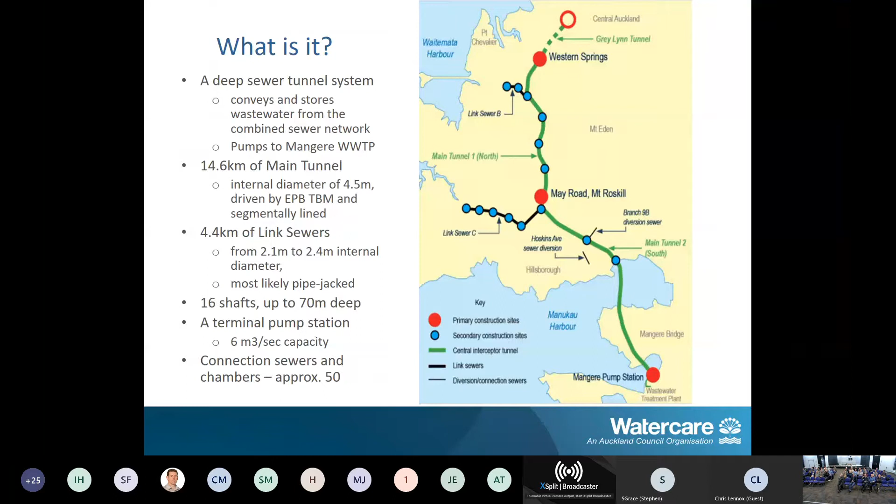There are quite a few connection sewers as well, probably 50-odd chambers. By themselves they're not an inconsequential amount of work, particularly given the difficulty of connecting in an urban environment, so they're probably $50 or $60 million just by themselves. The whole project has a value of 1.2 billion, probably the biggest project Watercare's undertaken, certainly in the last 20 years. By comparison, the cost of the City Rail Link, which seems to keep going up, is about 3.5 billion.

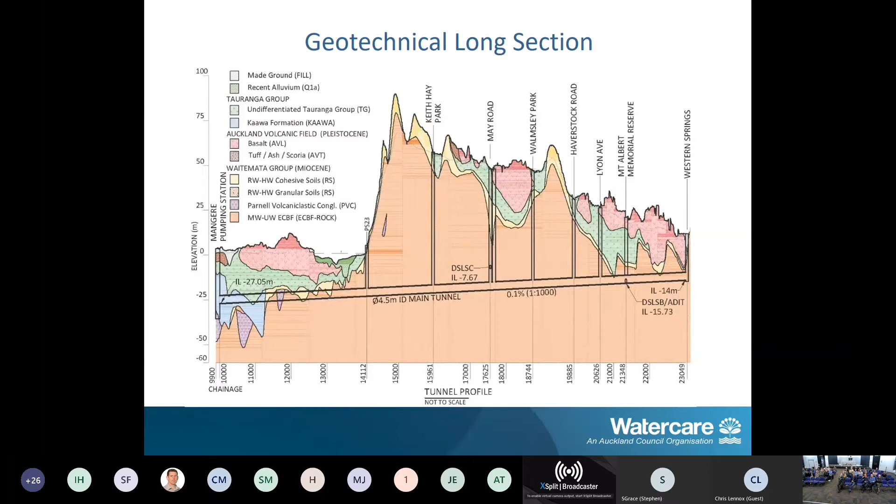So as I said, it's a gravity sewer from Western Springs or Grey Lynn to Mangere. The reason it's so deep is mainly geology. In the north we have a lot of basalt from the volcanic field, and some in the south as well with Mangere Mountain. So we've positioned the sewer underneath the basalt rock in the easily tunneled sandstones. For comparison, the rock can be up to 300 megapascals in strength, whereas the sandstone bedrock of Auckland is more like 3 to 6 megapascals, so it's a much better material to be tunneled.

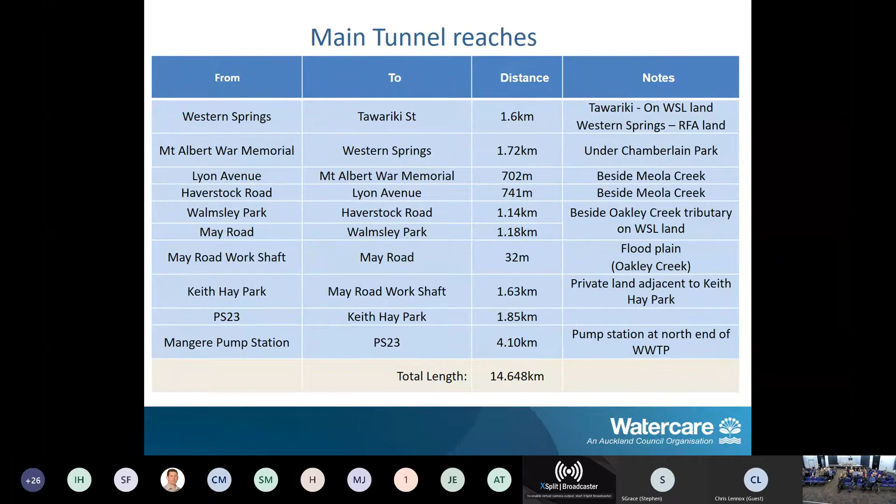Main tunnel reaches vary, up to about 4 kilometres for the southern part of the tunnel from Mangere up to Hillsborough. That number's just for the main tunnel, the 14.6. You can see there are some quite long reaches here, which would make access for maintenance very difficult.

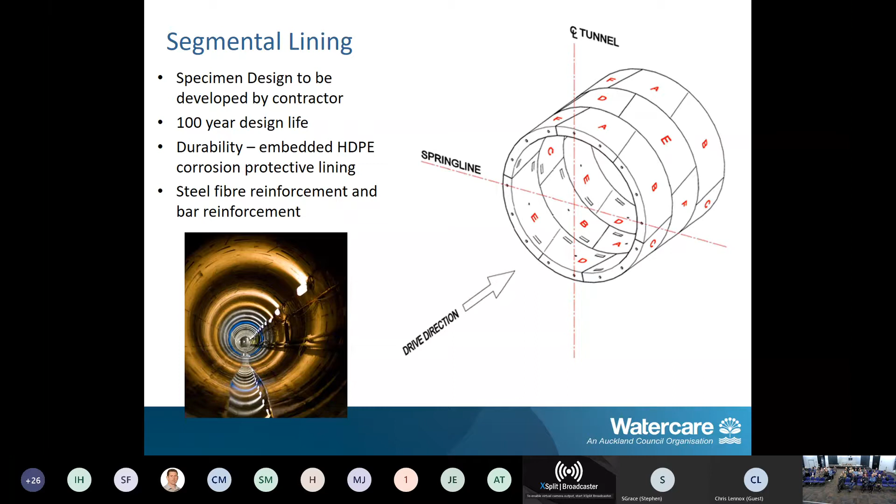The tunnel will be lined with concrete, with an embedded HDPE liner for corrosion protection. This segmental lining is pretty common in tunnels around the world. The link sewers will be pipes jacked in the conventional pipe jacking microtunneling exercise. They'll be partially reinforced with steel rebar, and some segments, mainly through the sandstone reaches, will use just steel fibre, a hairpin-type fibre of steel impregnated into the concrete. It has a 100-year design life.

So why is this scheme needed? It's principally because we've got some pretty old assets that are in vulnerable states. The Manukau siphon goes under the Manukau harbour, and that was laid in the 1960s, so it's coming up for 60, 70 years old.

That has always been a concern because it's laid on the seafloor in a trench, installed using a drag line. So it's exposed to being snagged by shipping and other things, but it's also exposed to the marine environment. When we build our tunnel, we'll be 15 metres under the seafloor at minimum depth, so it'll be more protected.

There's also a lot of growth projected in Auckland. We're currently sitting at about 1.5 million, and by 2030 we're expected to be 2 million. We see a lot of that development particularly in the catchments where we'll be working around Mount Roskill and Mount Albert, and catchments beyond that are also experiencing a lot of growth. So the Central Interceptor provides a spine network that we can connect some of these overflows to, and also areas under growth pressure, as well as reinforcement for the rest of the network.

All of the area on the eastern bays will be relieved by us diverting some of the flow. Essentially at the moment the Ōrākei system takes water from Western Springs, takes it all the way through the city out to Glendowie, then south through Otahuhu back to Mangere. So there's a big loop, which is a bit crazy, and it means by the time the sewage gets to Mangere it's quite septic. So we're taking it in a shorter, more direct route.

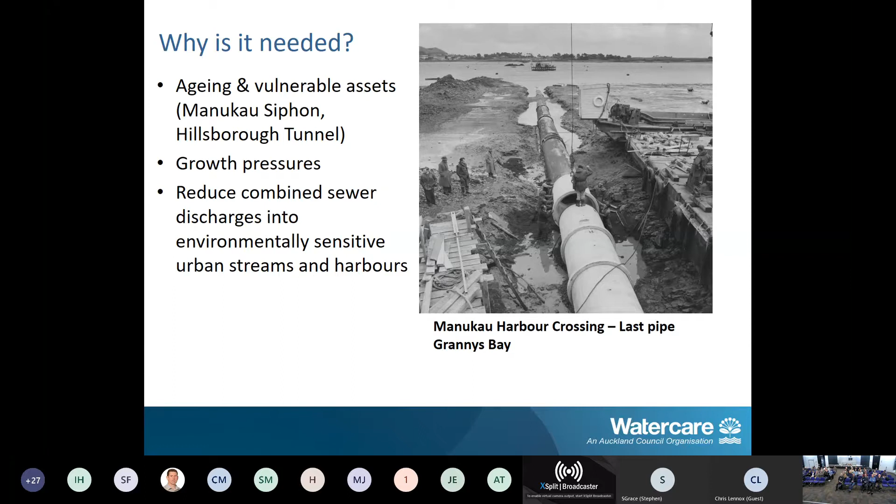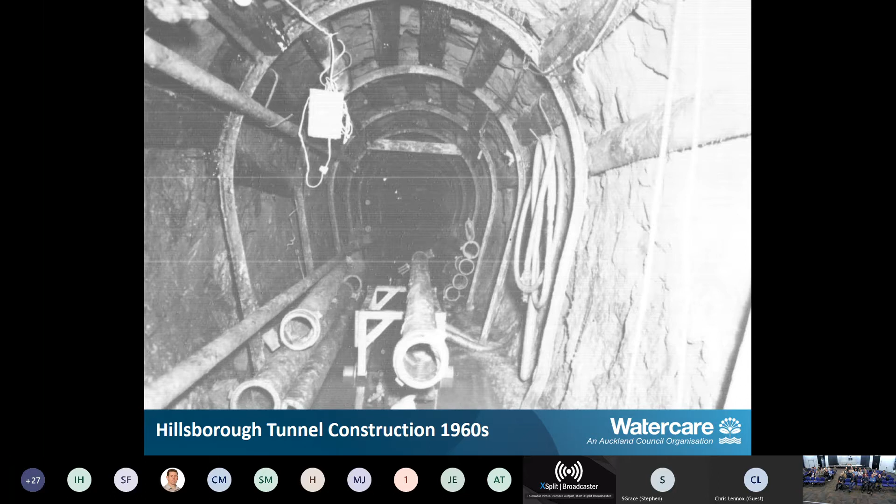This is a section of the Hillsborough Tunnel, which runs under the Hillsborough Ridge. Our tunnel will duplicate this and ultimately replace it. The tunnel depth at that point is 110 metres below the Hillsborough Road Ridge. You can see the very traditional means of installing it, and the very inaccessible condition.

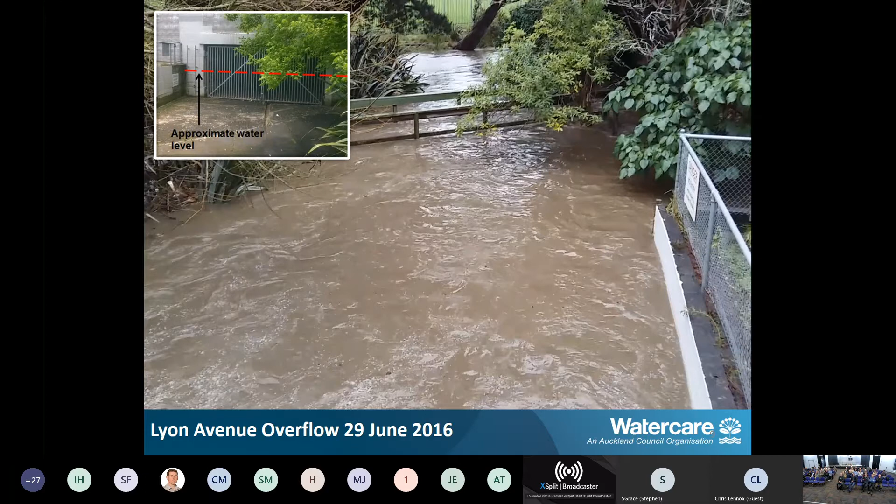This is the Lyon Ave spillway in Mount Albert, showing an overflow that occurred in 2016. It's good to compare it with the size of the gates on the overflow spillway, approximately 1 metre high. That's about 4 cumecs flowing out into the Meola stream, diluted with stormwater, but essentially it is combined sewage. This happens very regularly, usually in a big downpour, but it can take relatively little rain for this spillway to trigger.

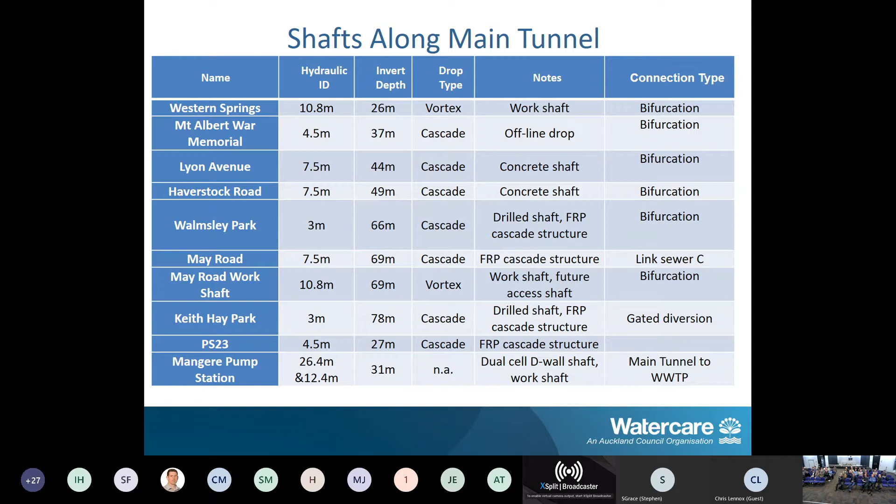I talked about the shafts. This is often described as a project of shafts rather than a tunnel, because the shafts are the more complex elements. You can see the depths — 78 metres at Keith Hay Park, so very deep. Quite uncommon in a civil engineering context to be drilling shafts that deep, less so in a mining environment where they can go for a kilometre or more.

As you might expect, we're using some of the modern tools, so we've got 3D imagery. We use this a lot for stakeholder engagement, so we can describe to stakeholders what's actually going to be built in their backyard. But we've also used it for safety and design and for planning construction. These tools are really useful, and I've got an example of the pump station at the end of the slideshow.

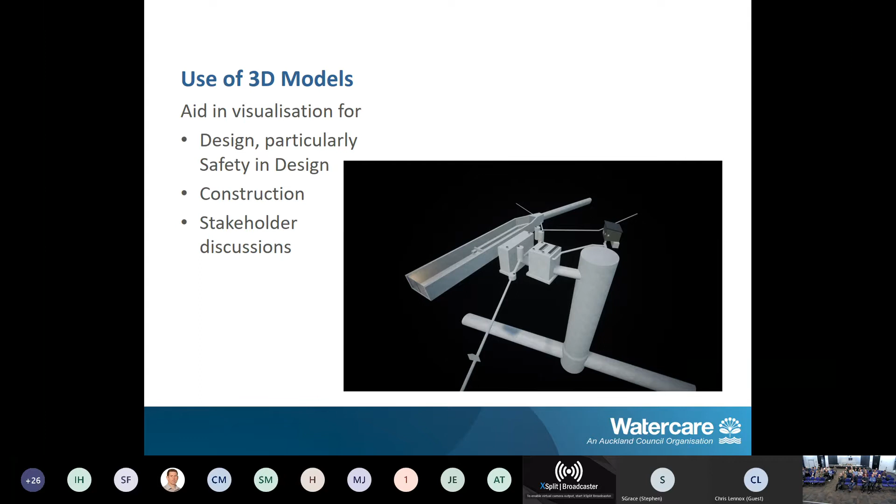The drop shafts — there's 16 of them — and we went predominantly with a cascade drop shaft style. These have quite a few benefits: you can insert flows at any level. The alternative would have been a vortex drop shaft, where you put it in at the top and it spins around as it goes down the chute. You can't interrupt the flow on a vortex because it develops what they call an air core, which draws air down into the tunnel. So there are a number of benefits to the cascade drop shaft.

It has a wet side and a dry side. The dry side we use for ventilation and pneumatic control, as well as for inspections, while the wet side carries the flow. Most of the shafts are big enough that we can drop a man cage down on a crane for inspection, but we anticipate technology will continue to evolve — we're already using drones for monitoring construction progress. So we expect that in time we won't have to put people in these holes; we'll be able to send a robot down.

There's a mention there about real-time control gates. So essentially we've got a number of gates on the scheme that control the inflow into the tunnel, and that's to stop the tunnel from overfilling.

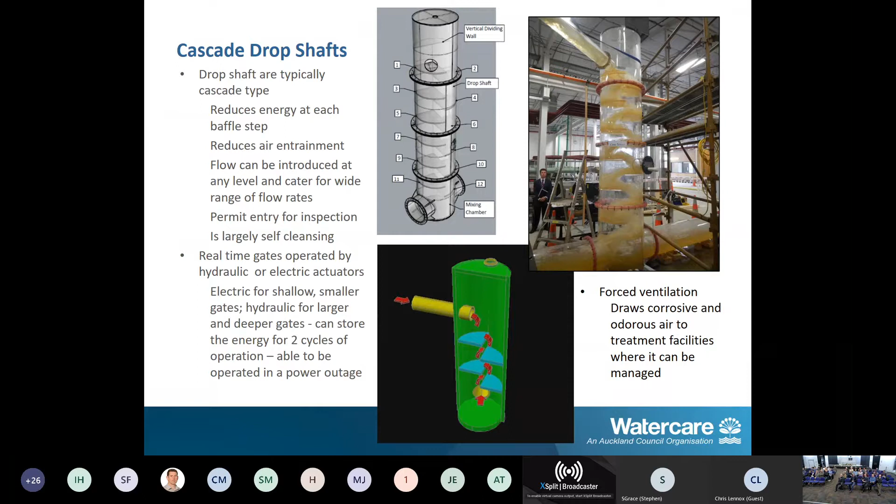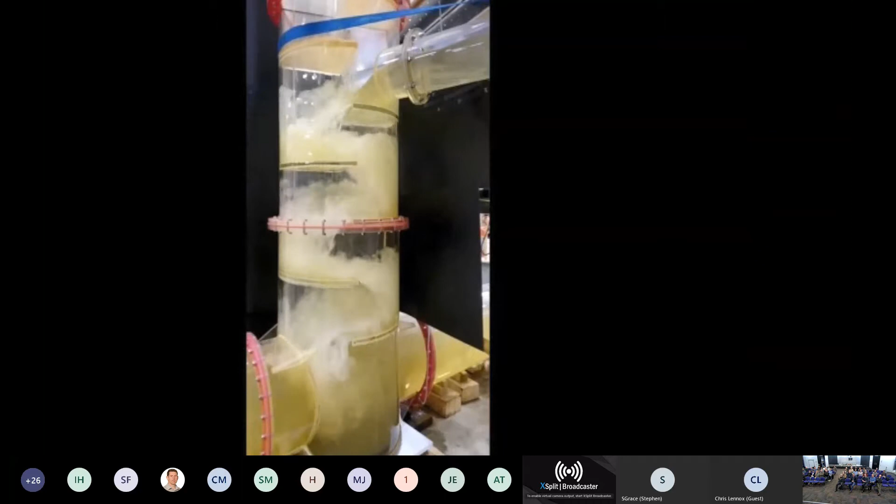This is a very slow video of the Cascade drop shaft physical model that we built at Auckland University. We did this in the fluids lab in Khyber Pass, and we tested a model of the Cascade drop through about a dozen scenarios - tunnel full, tunnel empty, sudden rush of flow, introducing flow at different levels - just to prove to ourselves that it was the right tool for the job.

That was quite a useful exercise, and it really brought the project to life as well, because we hadn't built anything at that stage. We had some drawings and thoughts, but we didn't actually have anything physical, so it was actually quite nice to have that.

The link sewers are, as I said, quite sizable assets in their own right, and the longest one is almost 1 kilometre long in a single drive. It's not a world record, but in New Zealand it's quite a long way to jack a pipe. And those pipes are over 2 metres, so they're quite sizable in their own right.

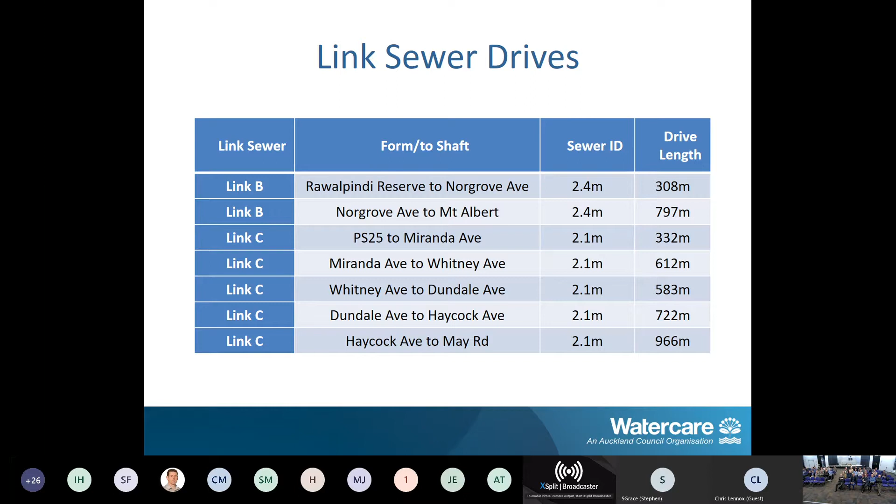I'll probably skip over this, but just to say that the link sewer shafts are not shallow - they're quite deep in their own right, so 26, 28, 25, 31 metres deep. They're pretty deep in their own right.

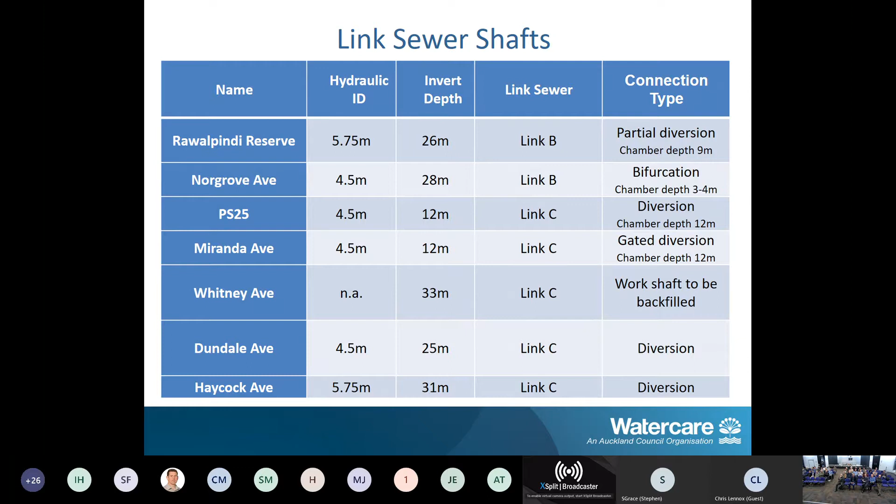So we're going to control the gates that control the inflow into the tunnel using the Mangere treatment plant system. The pump station at the treatment plant will be controlled on a Delta V Emerson system, which is what the plant uses. So the plant will control how the pump station operates and how much flow it takes into the headworks.

We will have a digital microwave radio UHF control system for the gates that gets operated through a repeater on Sky Tower.

And obviously there's a finite capacity in the tunnel - it's got about 240,000 cubic metres of storage. Once the tunnel is full, as I said before, we have to close the gates and spill to the environment. So we have a network discharge consent that requires us to meet a 2 to 6 spills per annum frequency, and a volumetric limit on how much the Central Interceptor can spill as well. So there are a few controls.

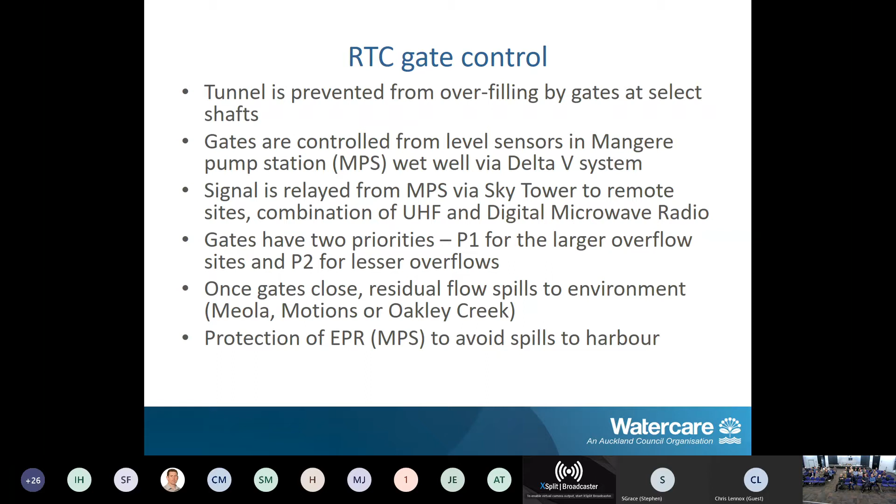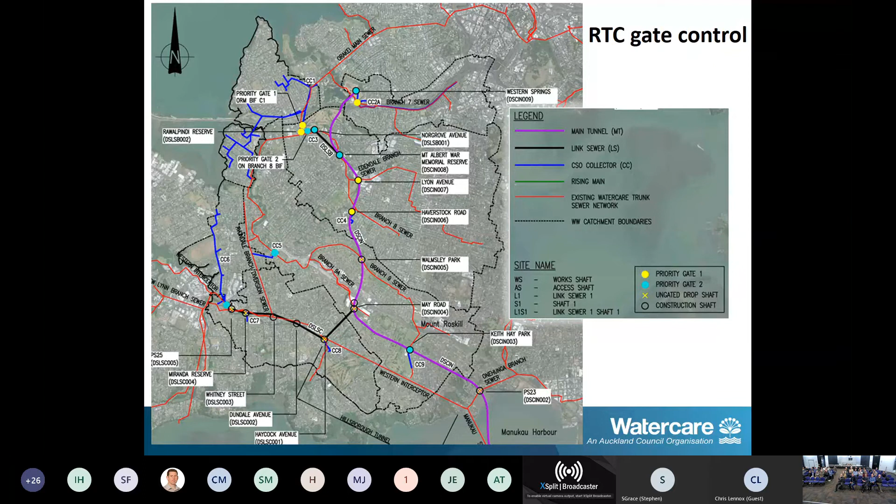240,000 cubic metres - 240 million litres if you talk in that parlance. And the gates are scattered throughout the city at different locations. Some of them require above ground structures, so we will be building some structures above ground - plant rooms that will look probably not as engineeringly mundane as this.

Some of them will have a public art treatment, which we're negotiating with Auckland Council. So we've got a number of requirements around those plant rooms.

The gates themselves will be a mixture of electric actuation and hydraulic. The hydraulic actuation isn't common to Watercare. We would normally put in Rotork electric actuators, but the feeling was that some of the deeper gates are large, and that we'd get a bit more power with a hydraulic system.

Also they're more resilient in terms of they can operate with a minimal power input using solenoid controls. So they would have a stored nitrogen accumulator cylinder system that enables you to cycle through 2 open-close cycles before you run out of that stored energy. The idea was these are going to be more resilient.

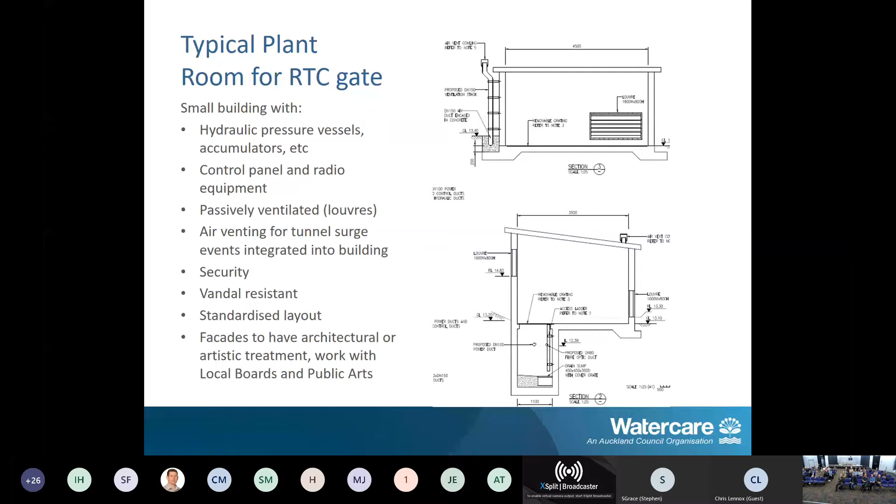We're going to get power outages in a storm when the tunnel's filling. We need something that's going to be a bit more capable of surviving that. And that's just a screenshot of a plant room concept.

So the pump station is, again, quite a sizable structure. It's got a value of about $80 or $90 million. It's very similar to another pump station that I'll show you in a minute. And it's got a capacity of 6 cubic meters per second with 6 pumps. So these are not small pumps.

They're installed with a manifold that enables you to feed flow different ways into 2 large rising mains of a 1400 millimeter internal diameter. They're being built right now, and they have to feed their way through the treatment plant, which is very congested with services. John will know all about that.

It's a portal frame building, and our consent requires us to have backup power supply. So we've extended the 11 kV ring main around the plant, so it actually now serves the pump station and the top end of the plant. But in addition to that, we're required to have an independent form of power.

So we're going to be installing standby generators. I think there's 4 or 5 of them to provide a 5 MVA capacity to run the pumps. So it's quite a big structure with all of that.

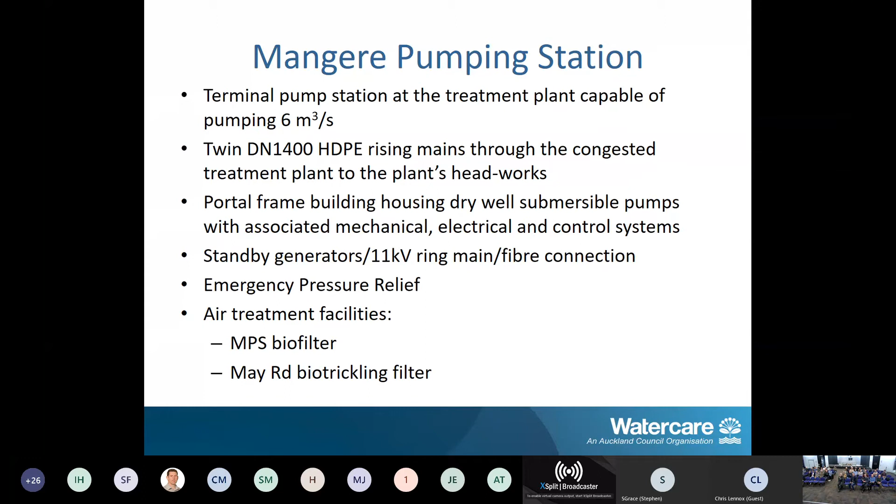And as I said, at May Road in Mangere, we have air treatment facilities. So that's a layout of the scheme at Mangere. If this works.

So this is the pump station here. This is the biofilter. It's going to be one of the largest biofilters that Watercare operates. This is the emergency pressure relief, which is this big box culvert structure. And then we have twin rising mains heading off into the plant through a manifold.

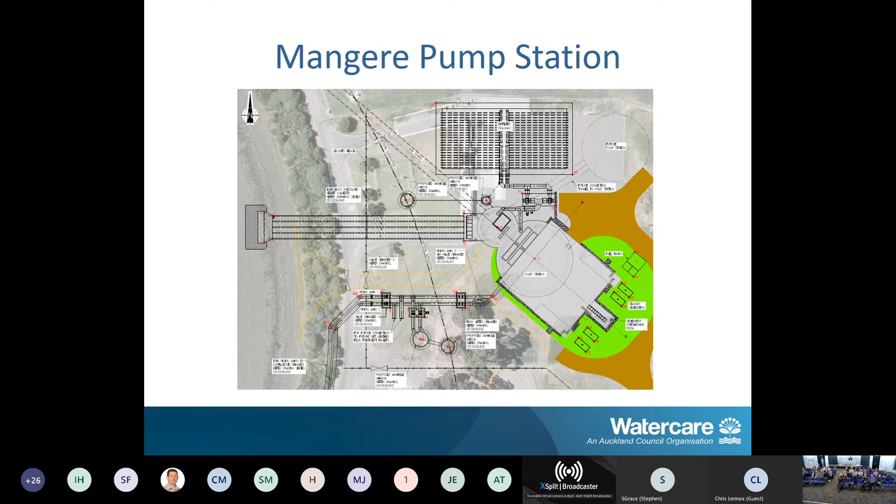The design here is we call it a dual cell or a peanut shaped design. So the wet well is basically this half, and this is an inlet chamber that provides a number of things. It provides a space for the air ducting to come in from the biofilter. It provides a weir structure for the emergency pressure relief, and it also provides a bit of a surge chamber there as well.

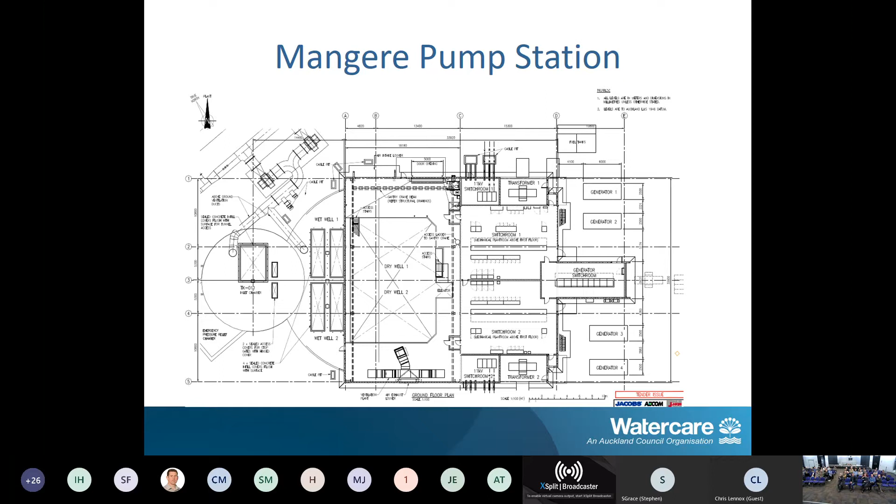So water enters from the upstream left-hand side of the elevation, comes into this inlet chamber, and then it comes into a baffle structure, or it goes into the sump of the wet well, and then it gets pumped out and up out of the station.

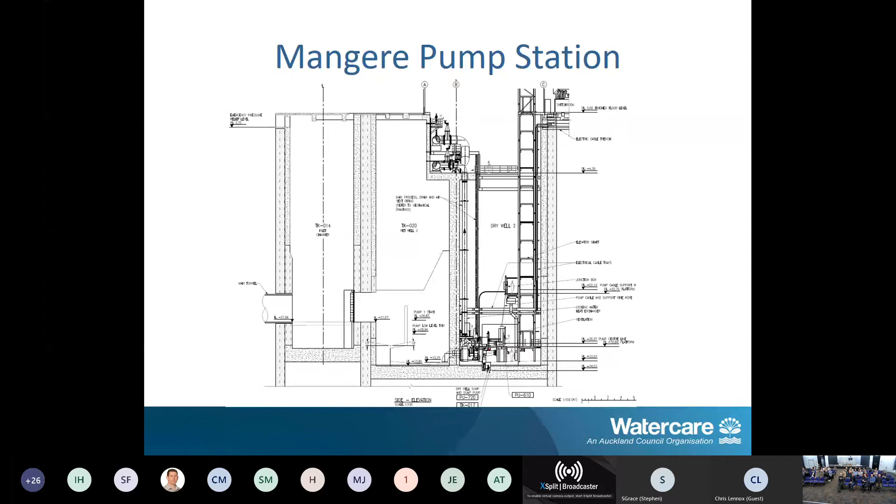So we've done a few things with this. We've got a BIM model, which I'll show you at the end. So that's the top left. We set up a physical model for this, and we ran a couple of scenarios with it. So the physical model is essentially what's shown in the top right in the red.

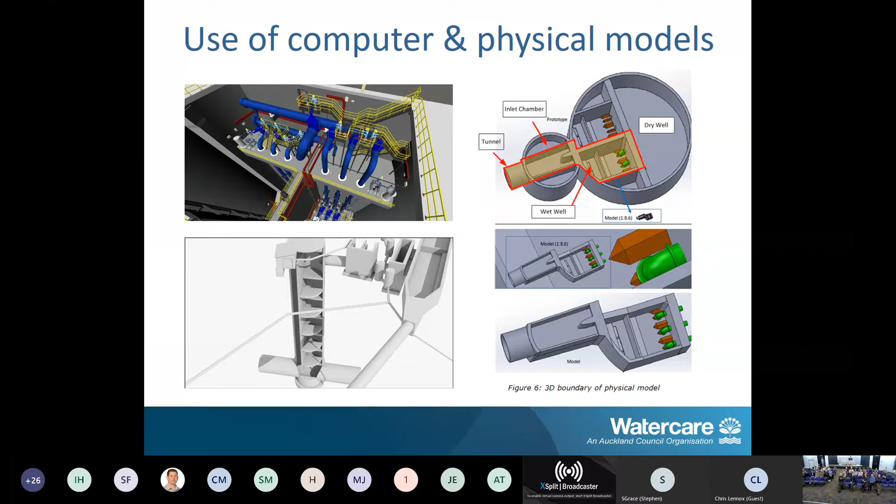And so this has all been done in Singapore at the Nanyang Technological University. And they do a lot of this physical modelling. So like we did with the Cascade drop shaft, we also did a physical model of the pump station. And again, we ran a couple of scenarios. I think it was about 14.

So we have water entering at one end and coming through the inlet chamber, through the wet well, and up through the suction bell mouths and into the pump system.

Essentially what we got out of this was we learnt that there's a dividing wall between the two, and we were getting overtopping of it. So we raised the dividing wall.

We proved that the pumps could draw sediment and material out, because there's a way that you can model little balls of plastic as sediment coming through the system. We also modelled it at different levels in the inlet chamber and in the wet well, just to see how the thing was going to perform.

So the Hydraulic Institute recommends that you either do CFD, or they say for pump stations of this size, you should do computational fluid dynamics analysis followed by physical modelling. And we said, well, we'll just do physical modelling, go straight to the solution.

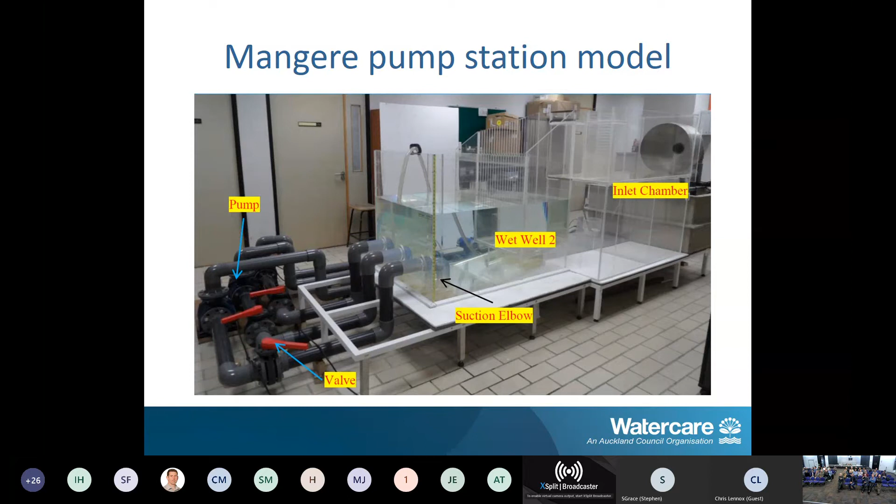Watercare does have a pump station that's very similar to this - our pump station 64, the new pump station, which is called 86, is very similar in its layout. But there were a few things that we learnt from this, about how to align things like the gantry crane above, which was not square to the shaft, and there were a whole bunch of lessons about how you put all the trunking for the cabling in, and where to put termination points and access for maintenance, that sort of thing. So we learned a lot from that.

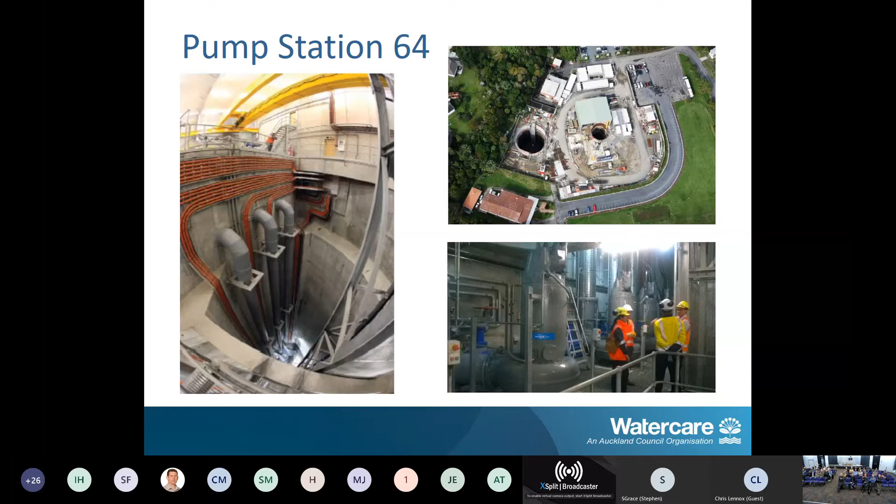This is the pumps at PS64. That's a similar sort of scale to what we're going to be installing at the Mangere pump station.

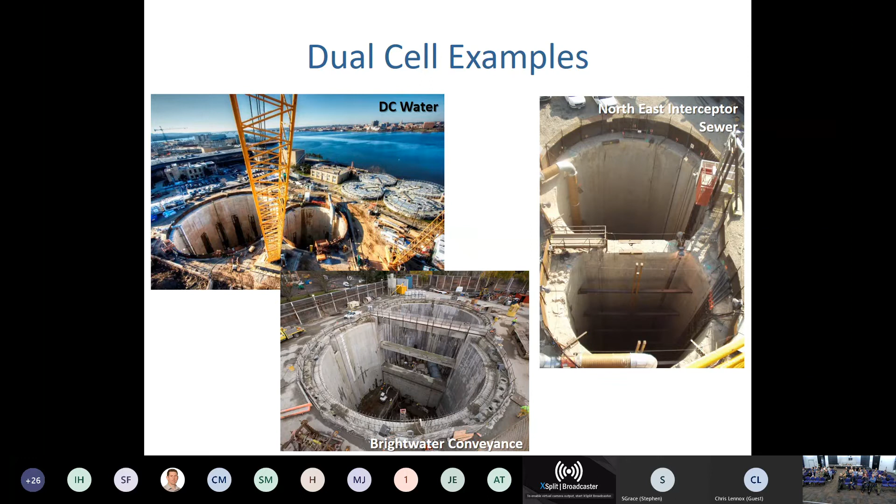I talked a little bit about the peanut dual cell shaft. These are just some examples from the US. The pump station shaft is actually 26 meters in diameter, and I'll talk a little bit more about that. The inlet shaft is another 12-meter diameter shaft. So it's all pretty big stuff.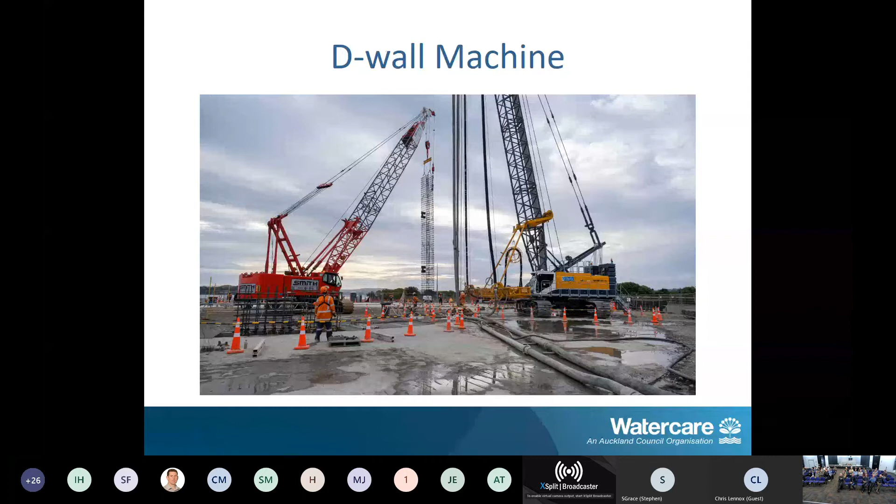Trying to lean towards the mechanical engineering part at this point. So I'm hoping this will work. Oops, sorry, that was a video, but it doesn't want to play. Anyway, it is going to play.

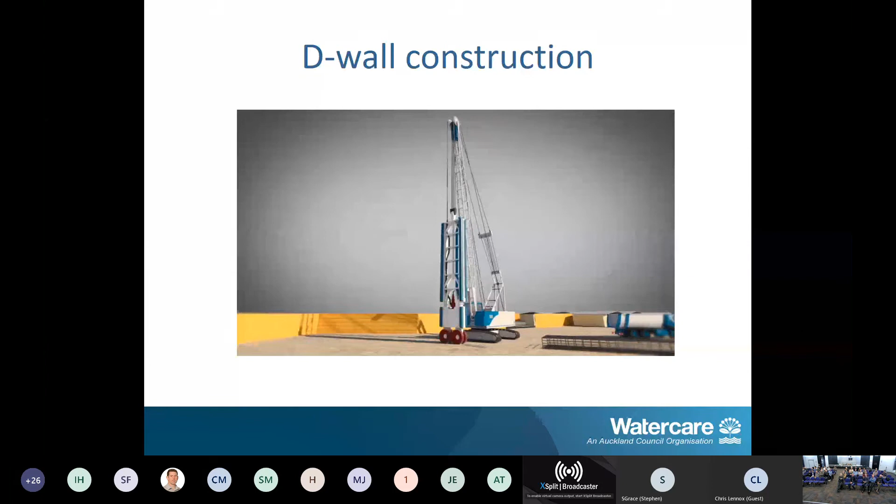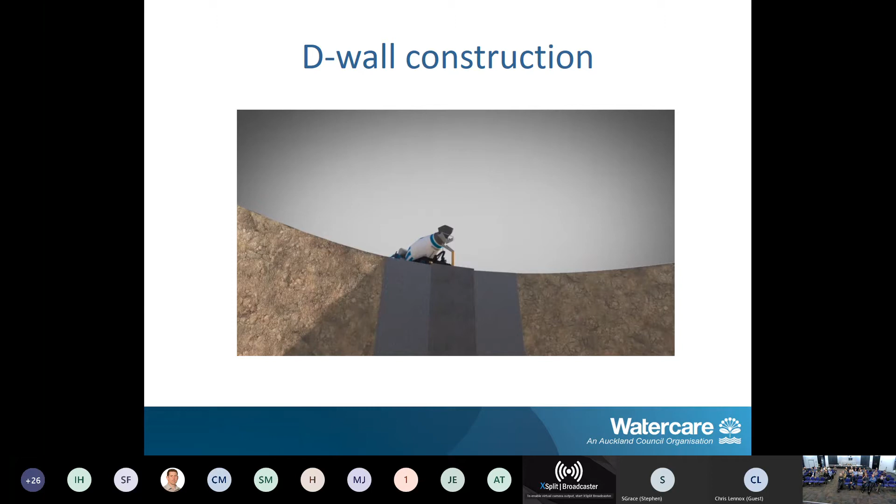What it's doing here is it's got a mechanical head on it that grinds the ground and soil and breaks it up, and it's extracted using a series of pumps, and it's essentially all under a slurry, bentonite slurry mix, to support the trench while you're doing it. Then you insert the rebar cage, and then you put concrete pumped from the bottom with a Tremie pipe.

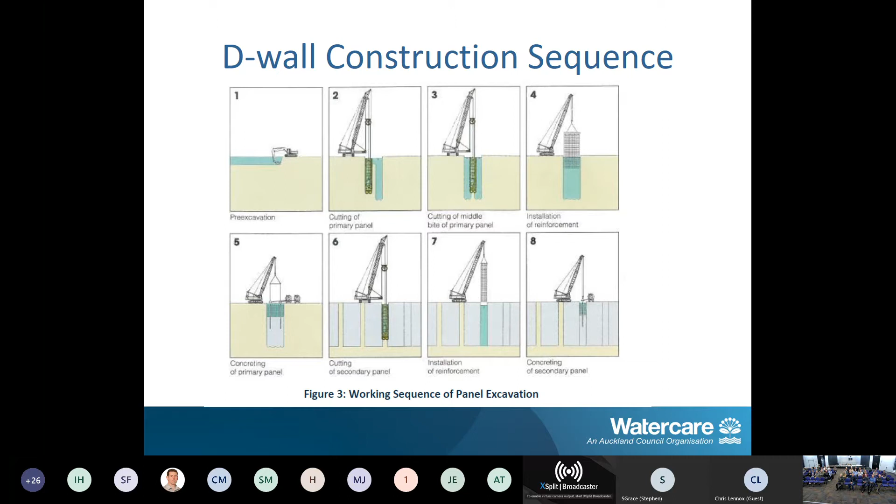That's the other way I could show it to you - multiple stages, where you're inserting firstly the mechanical excavator and excavating these panels, and then you bring in the reinforcing cage, drop it in, and then you pump concrete in from the base.

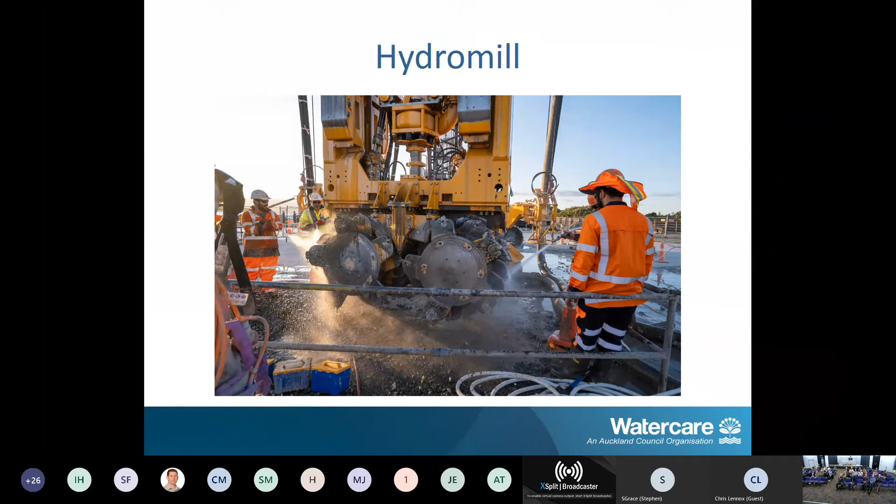This is work that's happened over the last, well, it was interrupted by the COVID lockdown, but essentially we've been doing it since about January. This is the machine that they brought in to do it, just to give you an idea of the size of it.

50-meter deep panels, 6 to 10 meters into the bedrock, 29 panels - I think that's just in the main shaft, the 26-meter one. 8,000 cubic meters of concrete, 590 tons of reinforcing, and then, as I said, the shaft diameters.

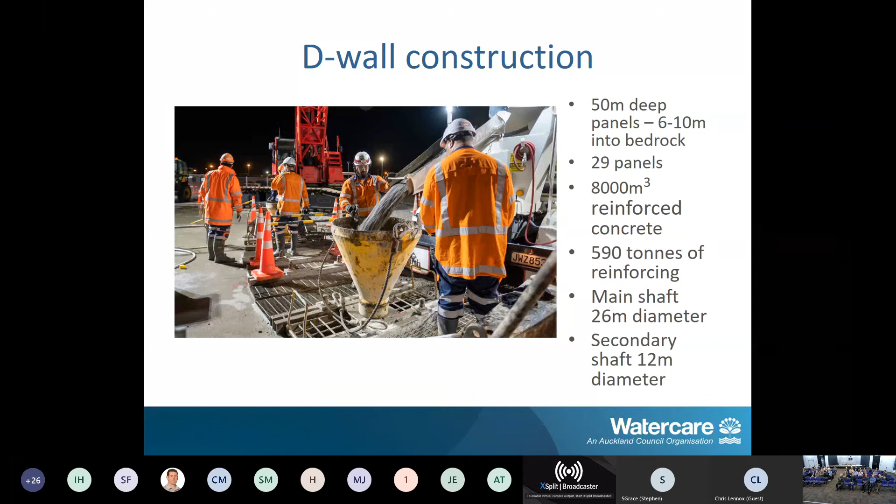So that was pretty much, wasn't quite 24-hour operation, but they did a day shift and a night shift.

We've also just taken receipt of a training tunnel boring machine, which is to get the teams up to speed with how the machine that we're buying, which will be delivered at the end of the year, will operate. This is actually a used machine that's been dismantled and reconfigured for training. Essentially the training they'll be doing on it is changing out the tools on the cutter head, but also just getting familiar with the amount of access they'll have getting in and out of the machine.

The tunnel boring machine that we expect to arrive in December is being made in Germany by Herrenknecht. They made the machine for the Waterview Tunnel as well, and I believe City Rail Link are also getting theirs from there.

It has a cutter head diameter of 5.4 meters. So our internal diameter is 4.5, but cut a hole and fill it with segments, it gets to be 5.4. It's got a mixture of disc cutters, scrapers, and the screw conveyor coming out the back is a 700 diameter screw conveyor. The total length of the TBM will be 165 meters.

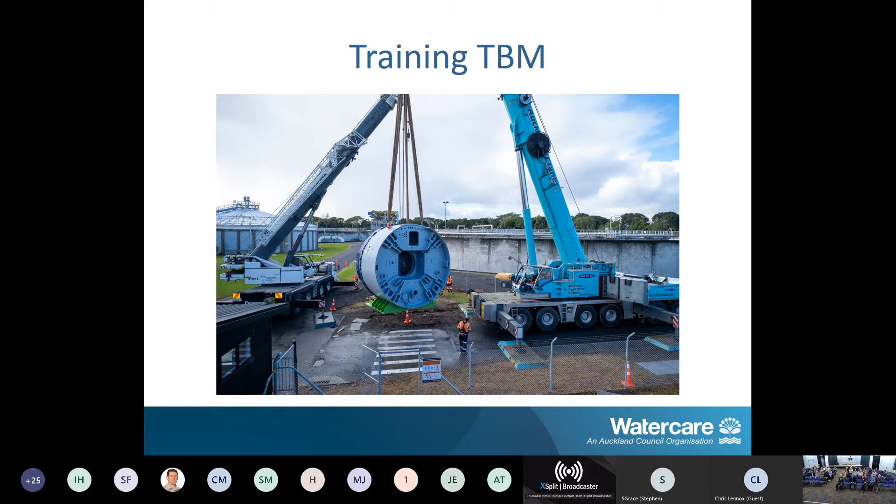The company that's making it probably churns out 30 or 40 of these things every year. I know that in Singapore they require a new machine on every job, and sometimes they only do a kilometre. So it's an interesting business.

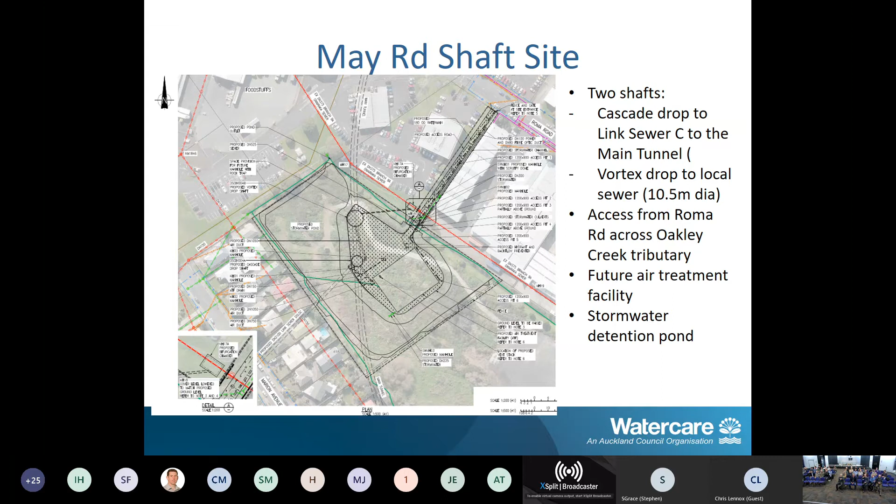So that's the May Road site. I think it was last week - you can't really see very much, but in essence, the smaller of the 2 shafts has already been started.

They've installed secant piles, which is a wall of concrete columns in a circle. They're ready now, just setting up the collar with the reinforcing cage. They'll pour that in the next couple of weeks, and then they'll be ready to excavate this down to roughly 50 metres, which will probably be done with a clamshell system.

The activity to the north there is the second of the 2 shafts. That's the 10.5 metre one that will be used in the future for tunnelling north.

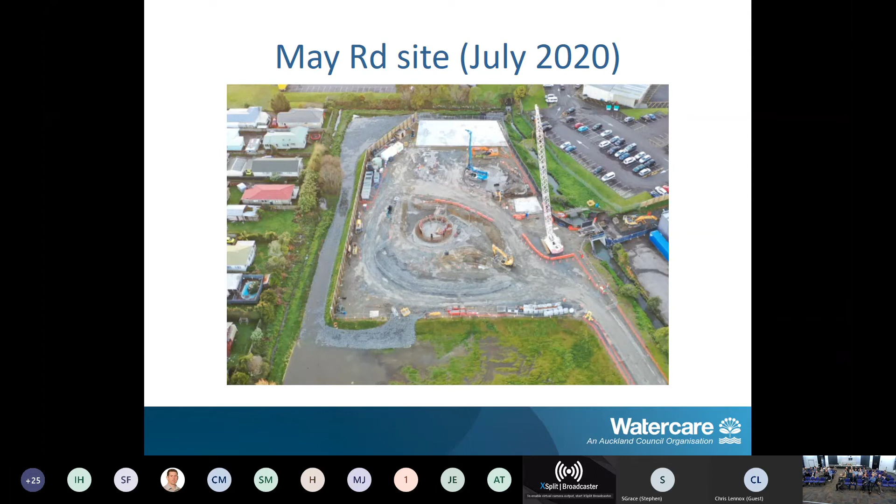And complete the stage 2 construction either late 2025 or early 2026. That time delay is probably as much about the 1.6 kilometres extra that we're going to do to the Grey Lynn tunnel.

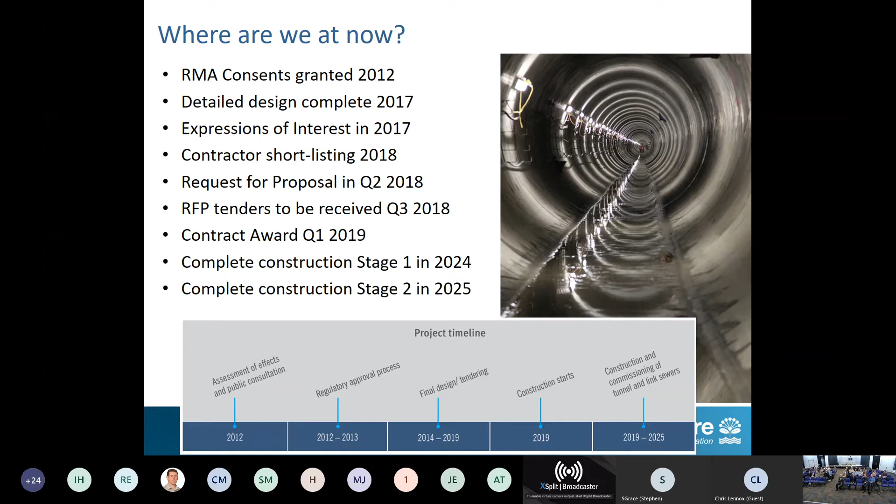As I said, we've got 4 sites active at the moment - there's the Mangere one, the May Road one, and 2 others, and we're soon to start a 5th shaft site at Dundale Ave in Blockhouse Bay.

So I was asked to talk a little bit about robotic inspection, and it's an interesting topic, but one that I'm not an expert in. Typically what Watercare would do is CCTV its trunk network on a 5-year cycle. Our trunk network ranges from sewers that are 300 millimetres up to 3 metres, and some technologies available to do the smaller pipes include little crawler robots fitted out with cameras.

Separately, we would also do select sewers with laser profiling, which would determine whether a pipe has gone oval shaped, if it's a round pipe. Not all our pipes are - some of them are egg shaped, some of them are square.

But there is a piece of equipment that I actually have seen in the flesh at the Water New Zealand conference, the RedZone Super MD profiler. It does a lot of things - laser and sonar, as well as CCTV. That's quite a useful tool. It's installed on a drag line, so it's not autonomous, which would be probably ideal.

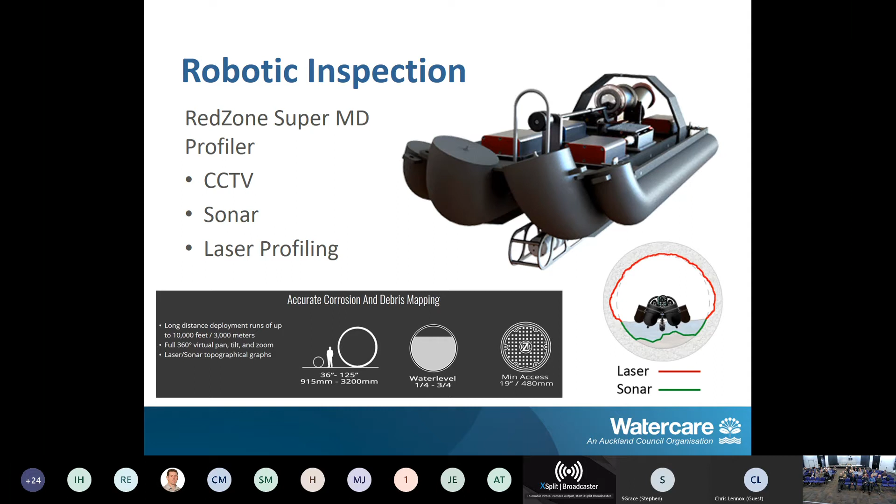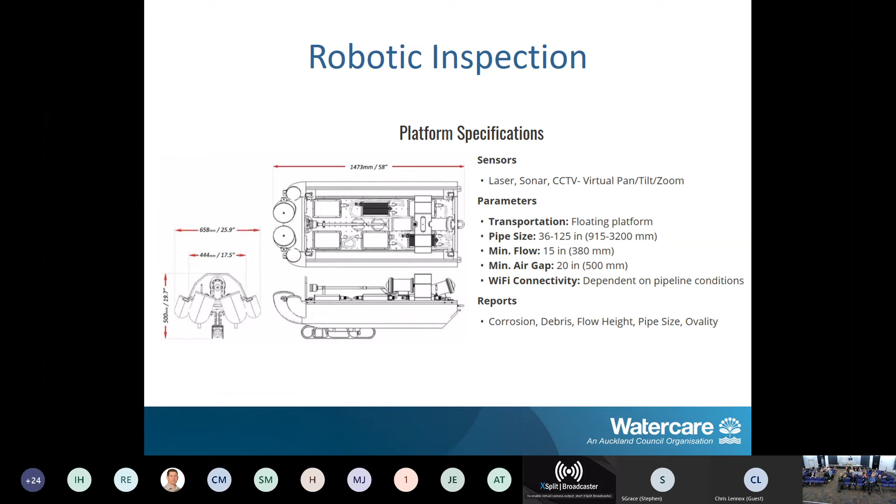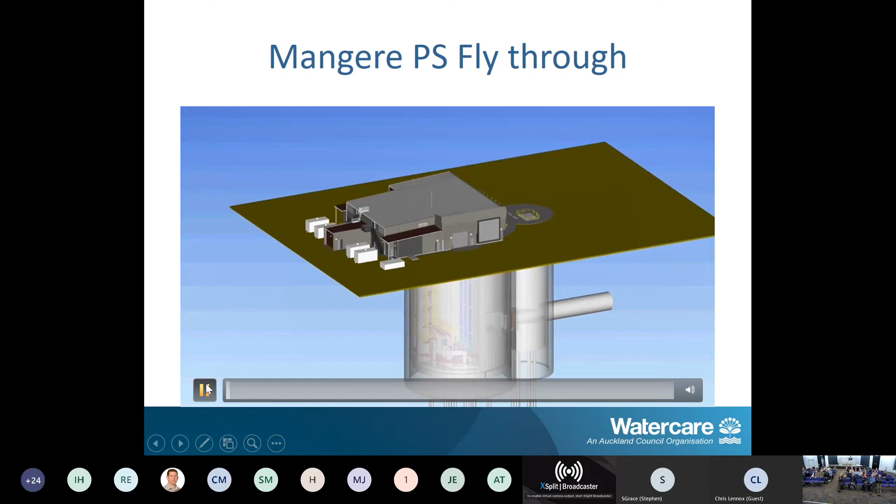So this is going to work. So this is the Mangere pump station.

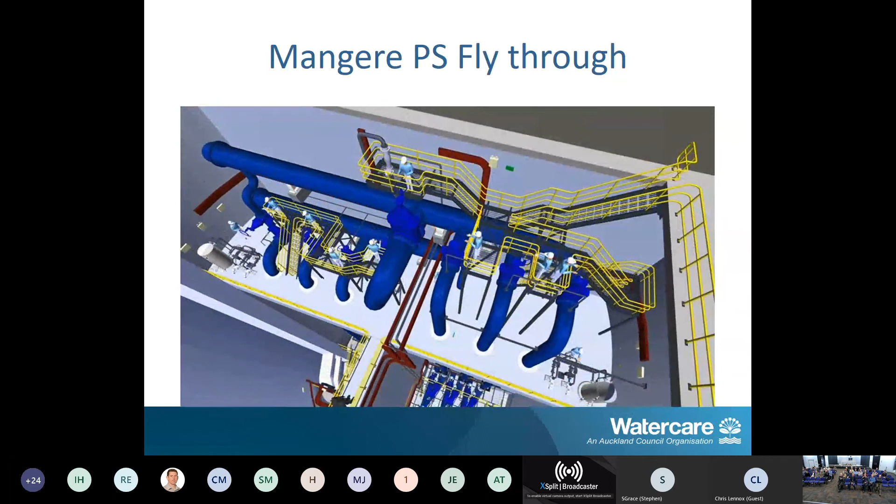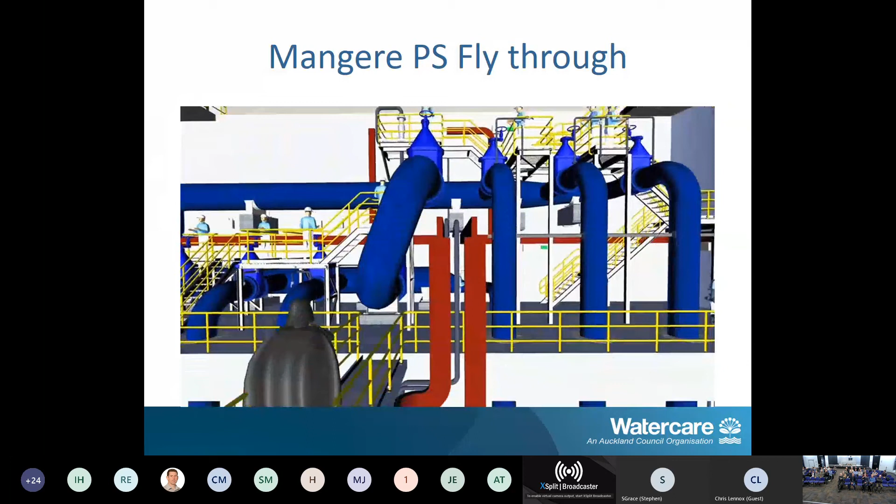This is the video of the BIM model that we had produced. So it just gives you a bit better visualization rather than the awful 2D CAD drawings I showed you earlier. So it's set up with a manifold so that you can alternate the pumps. So you don't have to run all of them at once. You can run them in different series. And it's got separation between the two sides of the dry well.

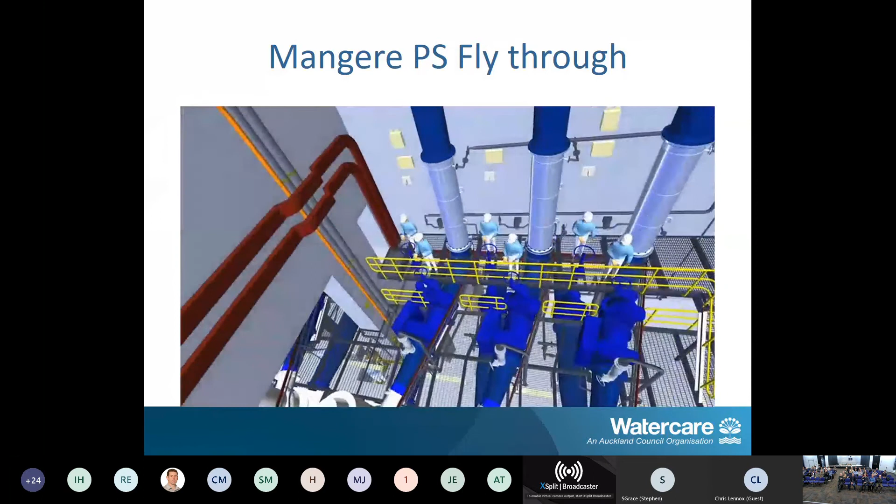It's a bit stilted, this video, unfortunately. I thought if I ran it off my computer, it would be a bit smoother.

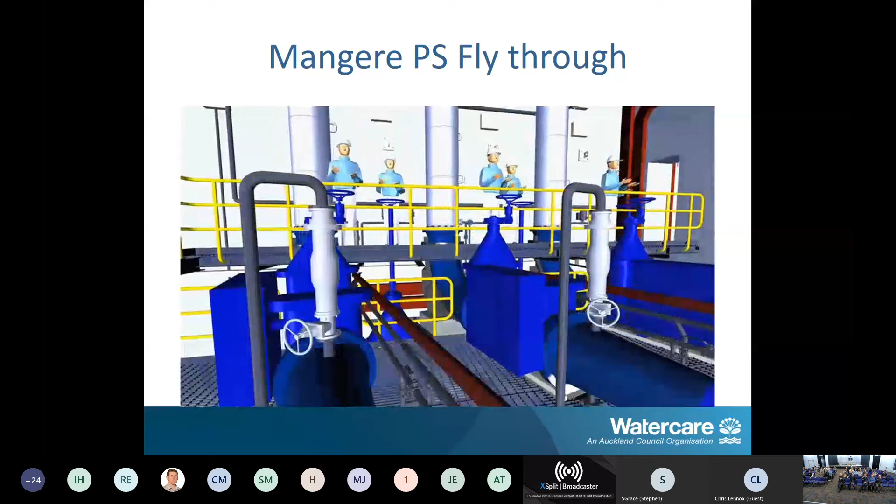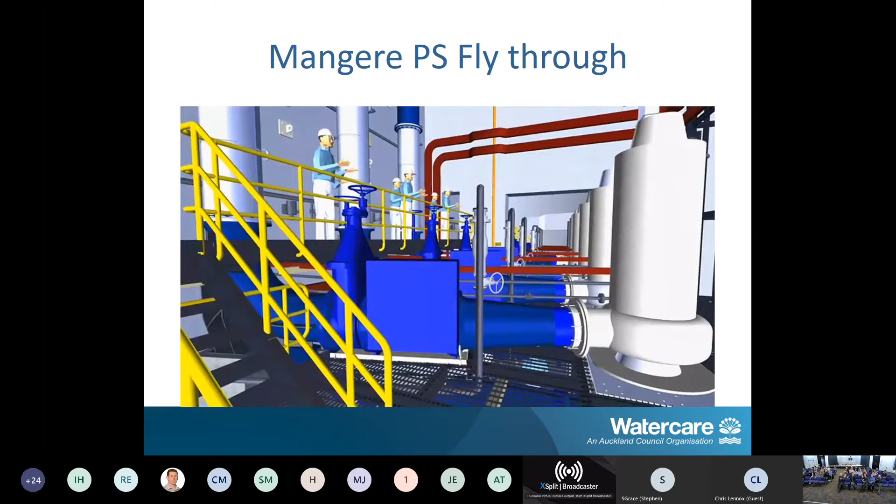So there's a few things that we continue to optimize. There were heat exchangers on the risers up the wall. We don't think we need those now because of the type of pumps that we're likely to select. And we won't have that many staff involved in operating the station. It'll be generally unmanned, as most of our pump stations are. And we're sort of working through the pump selection. There were 4 suppliers that we were looking at, and we've got it down to 2, but we're still to award the contract for that.

So that is my presentation. Willing to take questions.

Well, thank you, Steve. Just a point of order before you take over. I've promised Steve that we won't deal with any questions about the drought. And this gentleman here is a black belt in karate, taekwondo, anything like that. And he's allowed to hit anybody with this microphone who asks the wrong sort of question. So if you can hold that, and if you're all very nicely behaved, at an appropriate time, we might be able to persuade Watercare to talk about what they're doing in that direction on the clean water side. So I'll hand this to Simon Hall, and I'll thank Steve, and at the end of it, we've got a small gift which I'll present him with.

So here you go. All right, thanks John, and thanks Steve. So just while Andrew there lets us know if there's any questions on the interwebs.